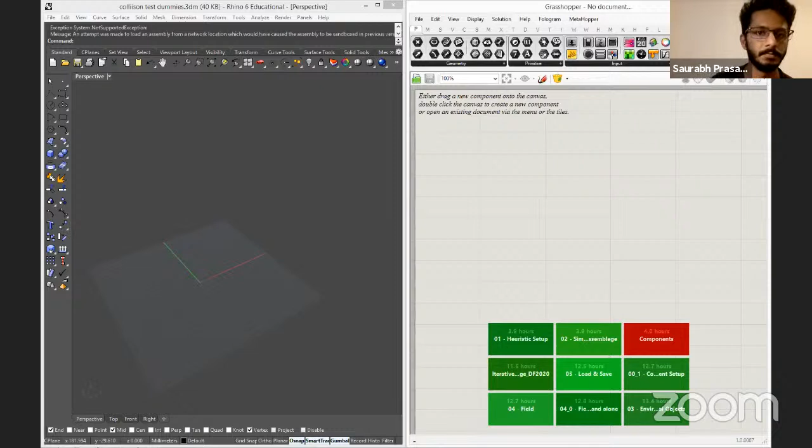Like I told you, this is my first remote kind of workshop. I'm really not used to doing this. I'm so used to the dynamics of a classroom in presence, where you can actually feel the classroom, so sometimes you might have the feeling that I'm droning away. It's just very hard to have the feeling of your response, of your attention, when doing this in this way. But I will try my best to keep your attention high.

So just to start with, if you have your material downloaded, go to the folder inside the material folder. You have a bunch of subfolders, some Grasshopper definitions, and a Rhino file to start with. Let's open up Rhino and Grasshopper if you haven't done so already, and open up the 3DM file, the collision test dummies file. And in Grasshopper, we're going to open the first one, 00_0, the orientation principle.

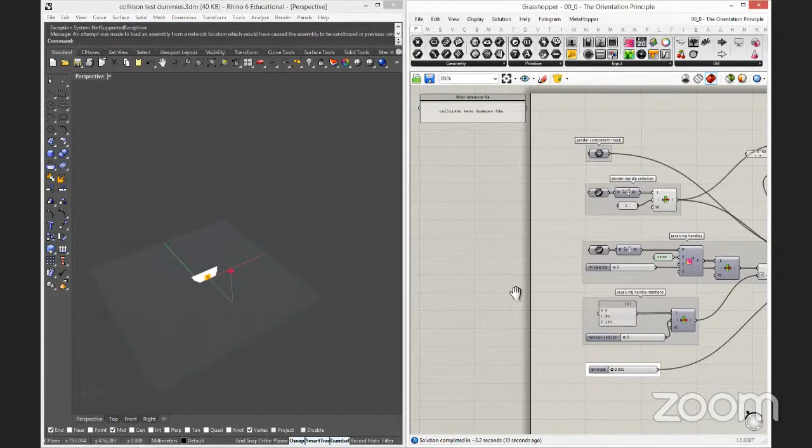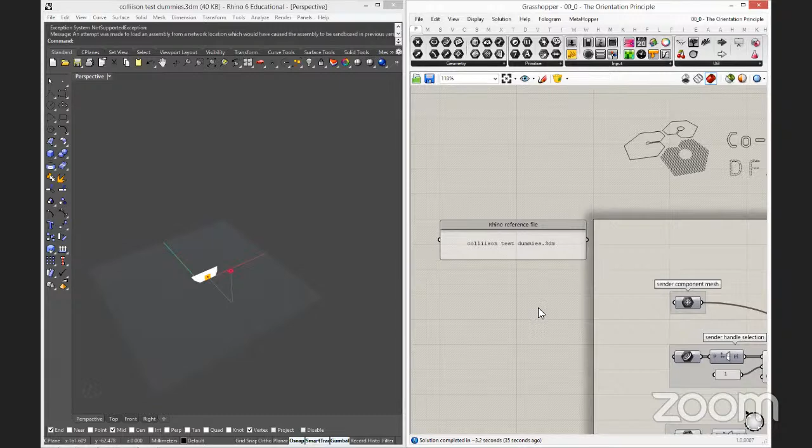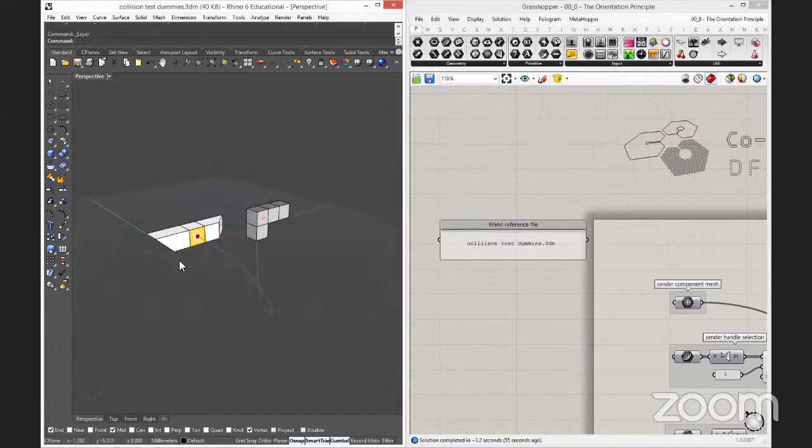Let me have a look around before we start. In each of the definitions, in this position on the top left, there is the Rhino file that you should reference with the definition. So in case something is not working, first check if the correct Rhino file is open. In the Rhino file, there are some layers switched off, so bring up the layer panel and switch on the components layer. Now you should see the basic geometry of the components.

So how does the basic principle with which we are working work? When doing assemblages, what you do is basically put an object and stick it onto some part of another object. That's the very elementary operation. To ensure this, the basic command that you use is an orient command, so you basically orient an object on top of another object.

When you have to define a position in space, what you need in terms of data is just a simple point. But to place an object, a simple point is not enough, because if you define just a point, the object can be in that position, but you don't know its orientation, since the object could be in infinite possible rotations around that point. So in order to define the precise position and orientation of an object in space, what you need is to define a plane, a coordinate system.

In Rhino, the object that corresponds to a coordinate system is a plane, which is not really a geometry, but much more akin to a real user coordinate system. In Grasshopper, these objects are called planes, but remember, they are coordinate systems.

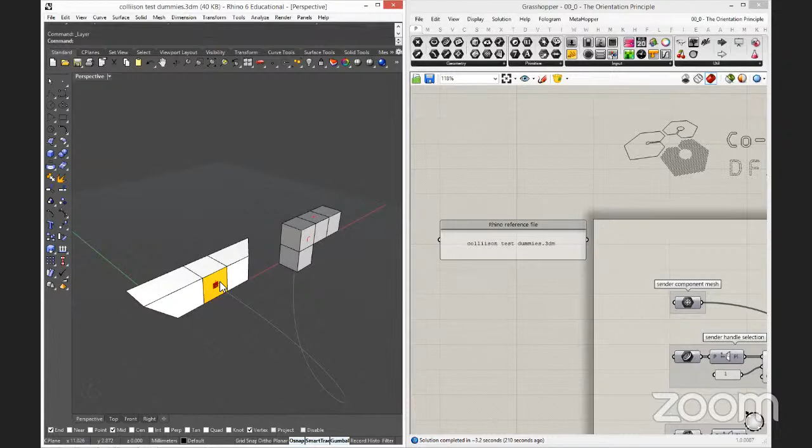It's just the concept that there is one plane that acts as the plug and another plane which has corresponding characteristics that acts as a socket. So when you have to plug things, you do this sort of thing. So how does this work in practice?

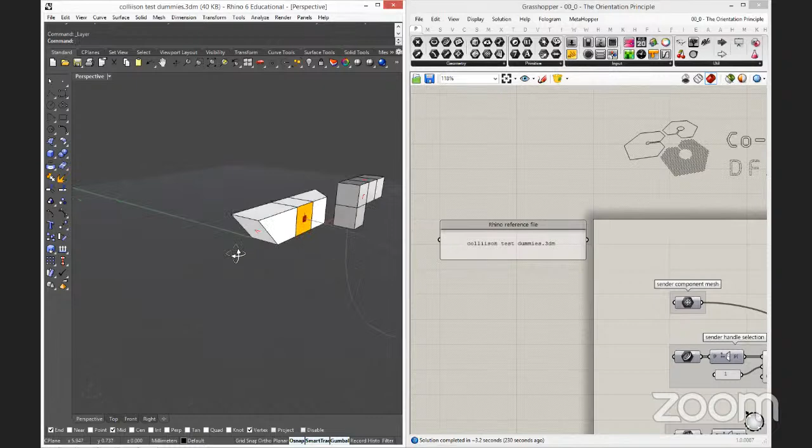So in the case of the file, I have defined two very simple geometries. And around these geometries, you can see there are some polylines shaped like an L, just like this one or this one. These L-shaped polylines are the geometrical objects that you're going to use to put a placeholder for a plane, because actually the polyline acts as a placeholder for 3 points.

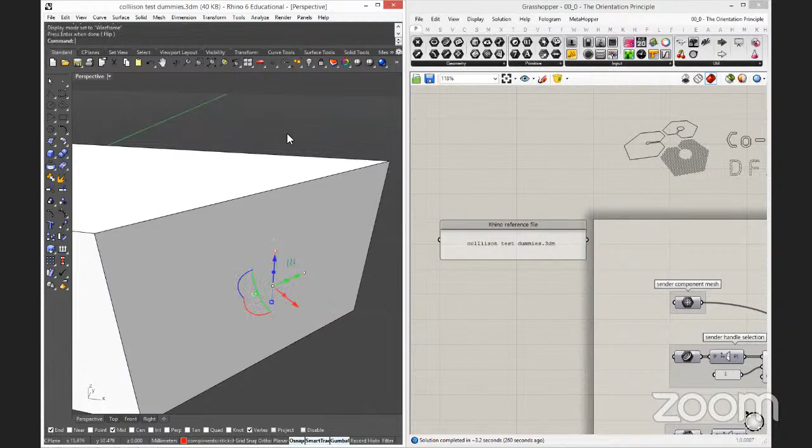So if you look at the directions of this object, now let me go to, well, what happened? Sorry. Okay, let's see in wireframe mode.

So if I look at the direction of, for example, this polyline, you see the polyline has to be drawn with a specific sequence for the points. This is the first point, the center is the second point, and this one is the third point. So the points have to be perpendicular to each other, but you start with the point that is in place for the x-axis, then the origin, then the point that is in place for the y-axis.

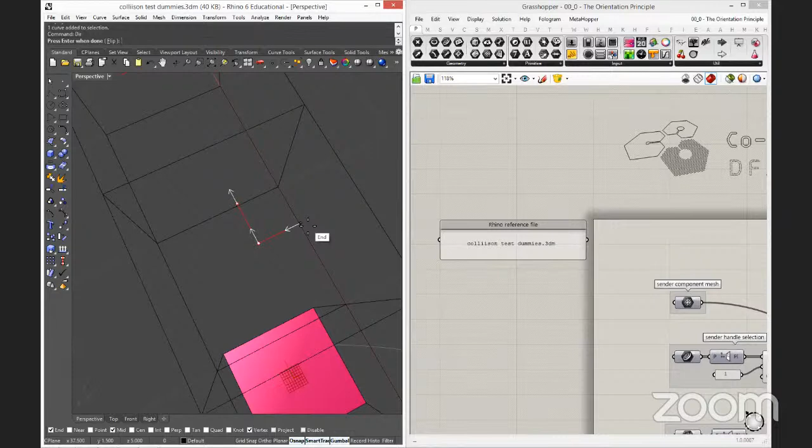So you know in this case that the z-axis is going outward with respect to the object, because of the orientation of the coordinate system. Are you familiar with the right-hand rule to determine the position of a vector when you have two perpendicular vectors? Or are you familiar with vector geometry enough to understand what a cross product is? Please say yes or no.

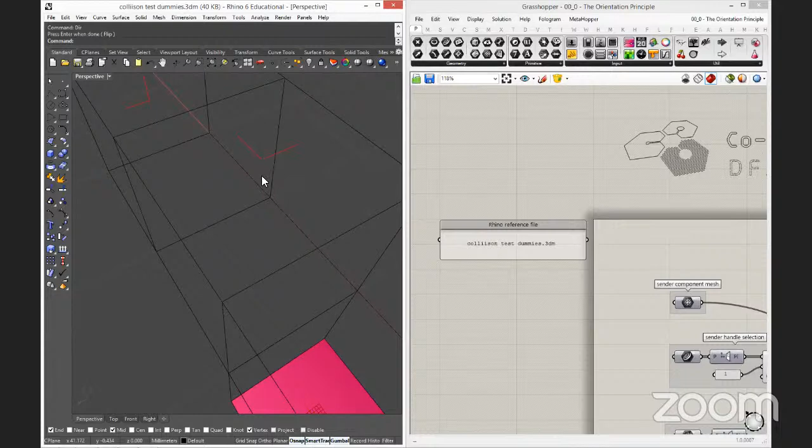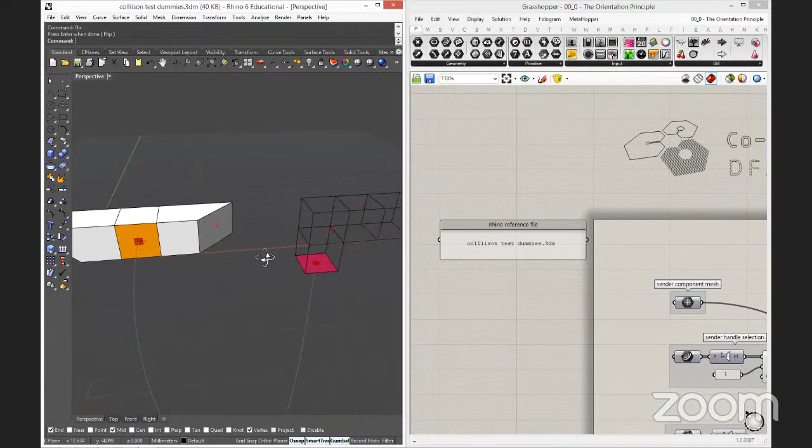Yes. Okay. So you know that if the two vectors are shaped like that, the cross product is going outward from the object. But if I keep this vector like this and I reverse this one, the z vector will go inward, right? And that's exactly the principle. If I want this object in this colored area, which is represented by this L-shaped polyline in the center, to go exactly in correspondence with this other colored area, since the object has been designed to be modular so that this yellow square is exactly shaped as this pink square, I have to place a sender plane here, with the Z outward.

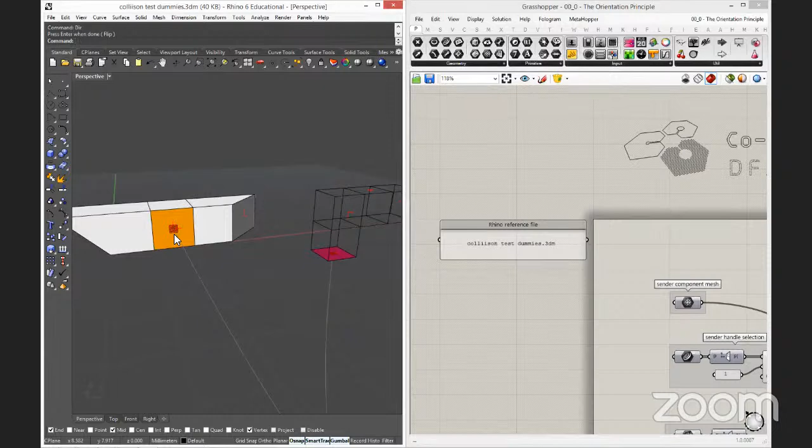And if you ever used Orient, you know that to do an orientation, the object will be transferred from this plane to the corresponding plane. But if I use another outward plane in here, this object will stay inside the other, because the planes will be facing exactly the same direction. So the trick is, for every position, you have a sender and a receiver plane. The sender plane points with the Z outward. The receiver plane is the same, except it's flipped around the Y-axis.

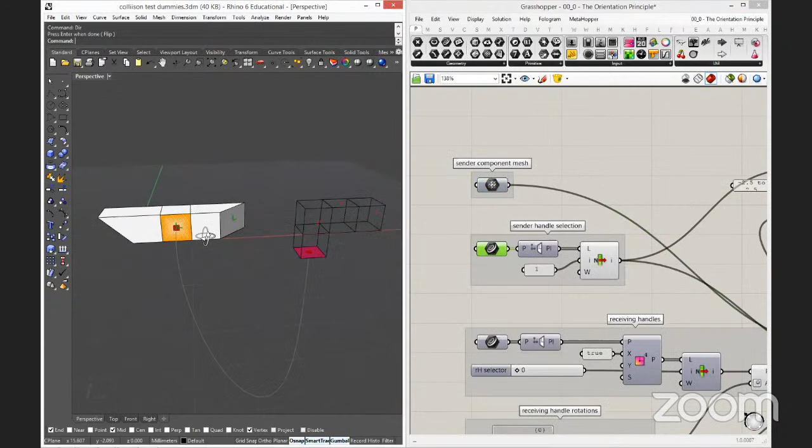So let's see this in practice. This is our sender component, the one that is highlighted. These are all its potential sender handles, and we selected just this one for practicality. And then you can select with this selector which handle you want to go into in the target object, the receiver object. So we'll call the one that moves towards the other the sender object, and the one that receives the object the receiving object.

You can also decide if the receiving handle admits some rotation. We'll look at the rotation a little bit later. So let's animate this. If you just scroll the slider, you will see the object moving exactly into position. Just imagine that from here you always have an arrow which represents the Z-axis that needs to plug into the Z-axis that goes inward in here. This is the kind of plug-socket movement that I was talking about.

So this is the idea by which you orient objects. You start with a plane in a specific position, and then you design a plane if, let's say, this attachment should be compatible. You should design them so that the handles, the orientation, and the position end up being in the same place. Since this figure is a square, it doesn't matter if I plug at 0 degrees, at 90 degrees, or at 180 degrees, because being a square, if I rotate 90 degrees, the component will still be compatible.

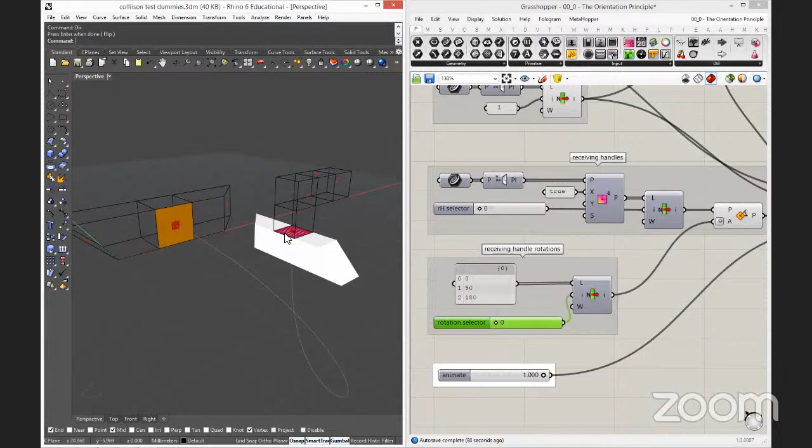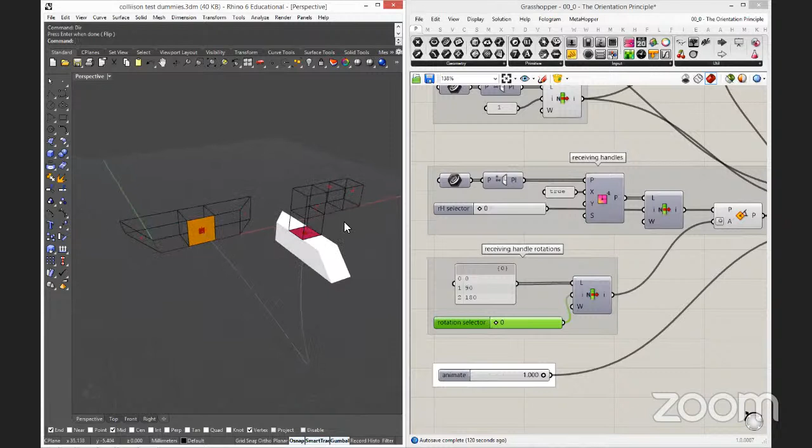When designing the components, you will have to design also the specific positions of these handles. And all of the handles are going to be potentially both senders and receivers. This is going to be up to you to design them in a way that you make them compatible when the shapes are going together. So you'll need also to do some tests for the design of the component so that you know which one is compatible with which.

In this specific case, if you look at the two components, they are starting from a very simple modular principle, which is they start from a box and then there are some more boxes. It's just that this one has some slight variation in the ends. So this plain yellow square here is basically compatible with every possible handle in this other object.

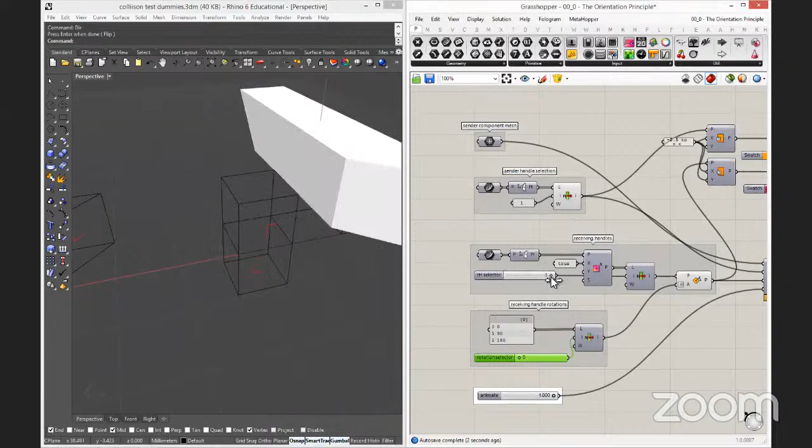So if we change the destination, we see where the object ends up, right? And we see that they are all compatible because they come from exactly the same shape. And since they are square, all of them support this kind of possible rotations, right? But if I look at the faces at the edges of this one, this is not a square anymore. This is different proportions. It's actually 45 degrees skewed in the horizontal and in the vertical direction, respectively.

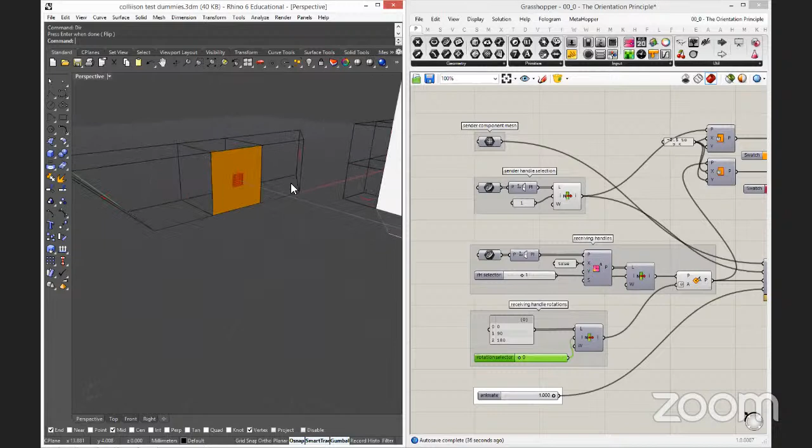So these two handles are not compatible with this yellow one, nor with any of the other objects, but they are compatible with themselves. So you will be able also to define a specific type for the connectors, or handles as we call them. So this square kind of handle can all be assigned to a specific type, and you can call it type 0, for instance. So all of the squares, you can define them as handles of type 0. So the system will know that they are cross-compatible with each other.

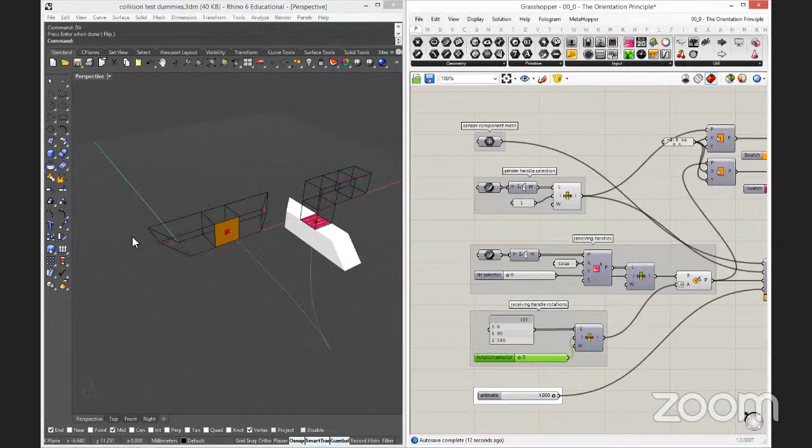And these two, since they are compatible with each other, but not with all the other ones, you can define them as handles of type 1, for instance. And you can go on and define as many types as you want. The system will be able to distinguish the type of handle and allow you to connect only handles of the same type with each other. So an object can also connect with itself, if you want.

Now, this is just a very, very simple visualization of the basic principle. But right now, what we will do is to start building up our first components and objects, because then you have to understand a few things that the objects are going to contain in terms of data that is going to be useful both for the assemblage process and for what comes next. Any question?

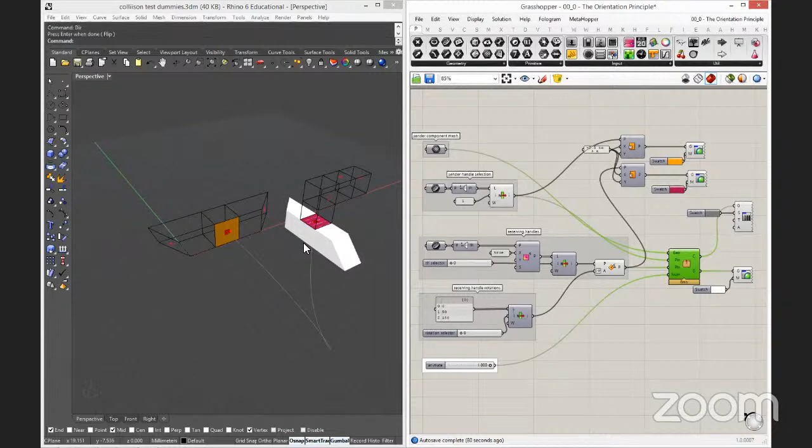No, that's good. Okay. All good. Great, perfect, thanks.

You will see also that we are going to work with, like I said, very simple objects, but we'll also give you some design pointers that come a little bit from what somebody else has done and out of experience. And some of you at least will notice a very strong similarity with a plugin that's called WASP and was developed by Andrea Rossi. There are a lot of things that WASP already does, but there are a few things that WASP doesn't do yet. So kudos to Andrea for developing WASP, which is a really good plugin.

I took a lot of ideas in terms of what WASP does, but then I decided to develop an entirely different project. Also because it's not in Python, it's in C#, because I'm more familiar with the language. So that's the need for the library. It's essentially a container for custom data types so that you can pass them from one component to the other.

I plan one day to transform this into a proper plugin, but until then, things are pretty much in evolution. So this is the reason why it comes to you in this very raw form. There are custom C# components and the library, and it's not really properly packaged yet. Because I still need to iron out some kinks, and actually I wanted to have feedback from those of you that are more accustomed with this kind of workflow, because we're going to do things a little bit differently.

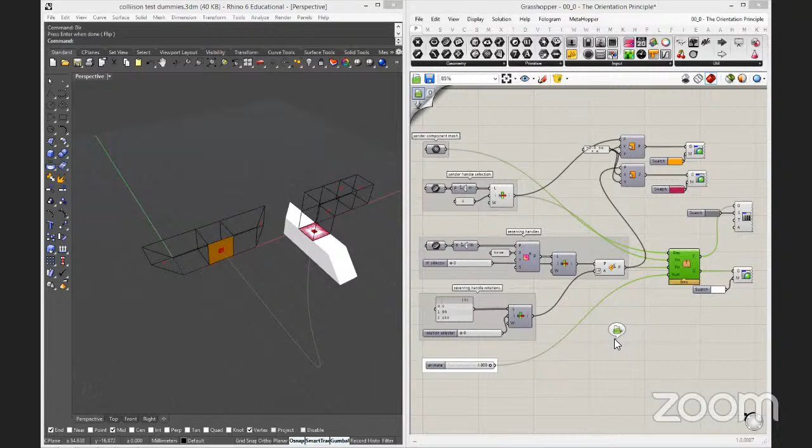So let's move on to the 00_1, the component setup definition. You can keep this. All the definitions up to the 05 work with the same Rhino file. So when you open the definition, you will actually see a prompt asking you to locate assemblies.dll. If you do it as soon as you open the file, Grasshopper should be able to point all the components in the correct direction for it. I don't think you have to do it component by component.

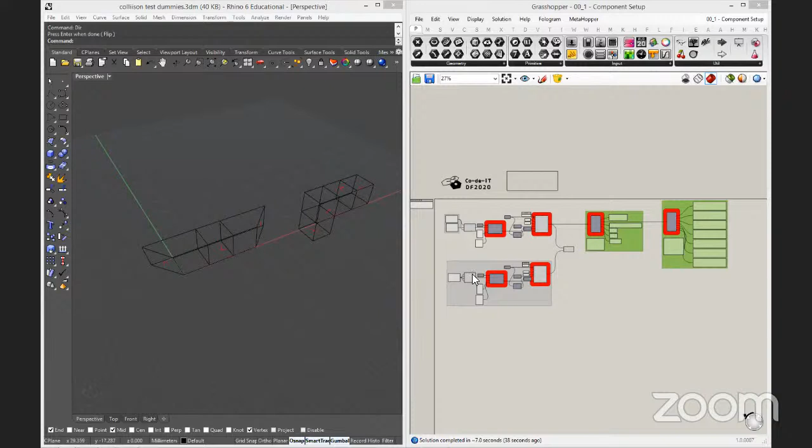So, okay. Let's start from the basics. The first thing that you need to do in terms of bringing your design into Grasshopper so that it's going to work with the system for the assemblies is to tell the system to build the handles. For any handle, you're going to need the L-shaped polyline. Just remember the sequence of points for each of them.

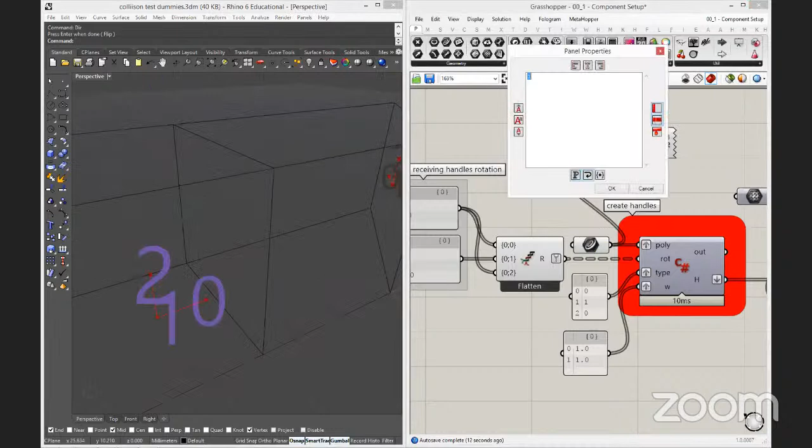So if I explode them and just put a point list just to see the order of the points. Yeah, sorry, I need to place the points, of course. Well, a little bit too much. Yeah, better. So you see the order of the points for each of the handles. 0, 1, 2. Maybe it's too much, even 1. Okay, now we go. 0, 1, 2, 0, 1, 2, 0, 1, 2. So you see how the polylines were actually drawn in the file.

So these polylines are converted into a plane inside this component. And for each polyline, you have to specify also all the possible rotations in case each of them works as a receiving handle. So all the polylines define, first of all, that in this position they work as a sender handle, and the sender handle has like

Probably you've lost me for a second there, I think. It's because of the rig I'm using for the microphone, because the computer microphone is so close to the fan, and the fan is like an airplane jet right now. So since I don't want you to hear me like I'm attached to the outside of an airplane, I had to rig the phone to work as a microphone. So again, if you stop hearing me for any reason, just make some noise, do something, and then I realize.

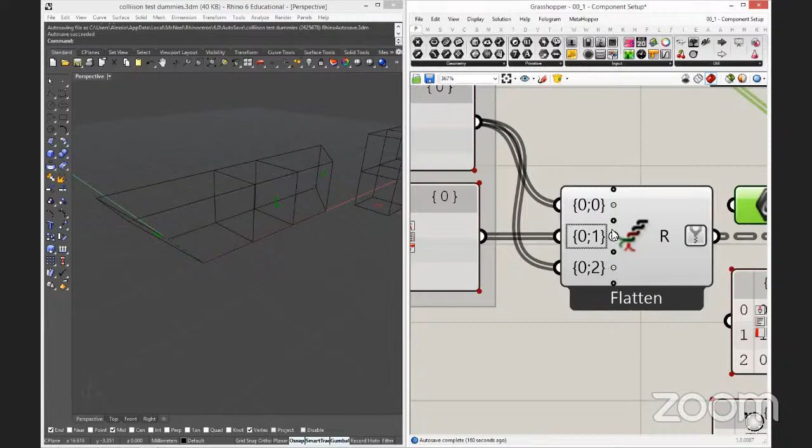Just remember, you should have an equal number of branches here to the number of polylines that you place in here. So even if you have just one rotation, just place a single number, but still use this entwine component to build up the set of rotations. Then you have to define the type. So in this case, you will see that the first and the third polyline are of type 0, and the middle one is of type 1.

Because of what I was saying earlier, you will see that all the handles in this other component are of type 1, because they are all compatible and they basically share the same shape. But the shape thing is more up to you in terms of design. The system, in reality, doesn't know anything about the geometry of the component in terms of recognizing the handle. It's up to you to design them so that when the 2 planes are coming together, the geometry is coherent and it sticks, and you can use it to create certain effects.

But the geometry coherence is actually a very important thing for using the assemblage as a computing instrument later. So if the geometry is not compatible, let's say that you define this as type 1, and in the other component, type 1 corresponds to a circle or a cylindrical thing, then you have like a cylinder going into a square, and it doesn't look good, okay? Long story short.

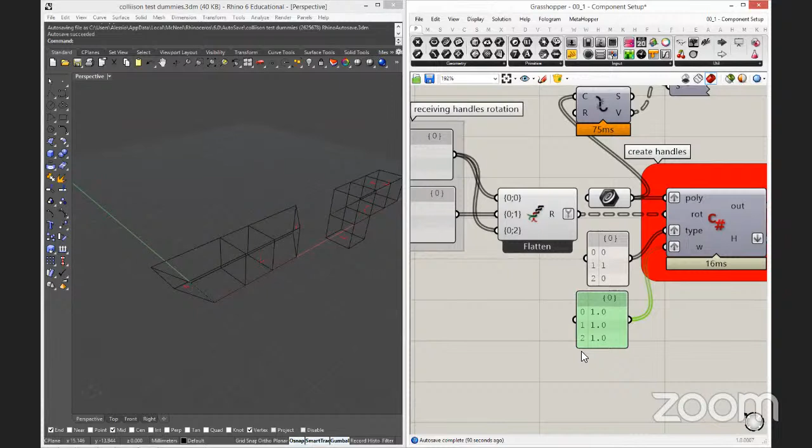So the weights should have, in theory, more or less the same role. They represent a sort of, let's say, abstract kind of section for the flow of data to go through. The bigger the weight, the larger the section. So if you want to distribute the data or see how a certain data flows through the system, then you input an amount of data in a portion of the graph, and then you see how it distributes around.

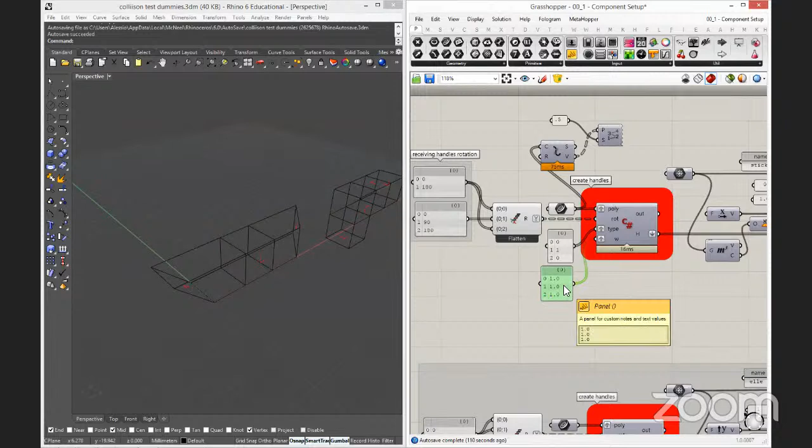But for the moment, they are unused. This is one of the things that I had in mind to develop later. I didn't know if there was time to do it for the workshop, but it definitely is going to get done later. But yeah, at this moment, you can really put whatever value you want. It doesn't matter. So what comes out of here is a custom type called the assemblage handle that is then managed by the other component, the builder of the assembly object.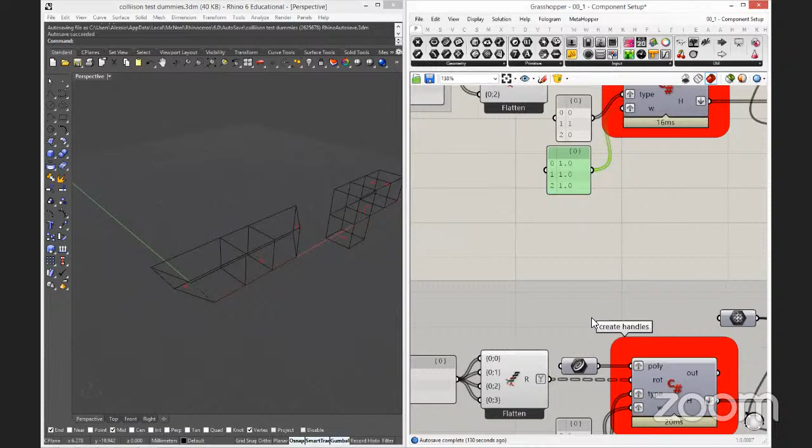The same thing happens for the other objects. So we build the handles. In this case, we have 4 handles, so I'm having 4 branches. In this case, they are all of the same type, so they are all admitting the same kind of rotation.

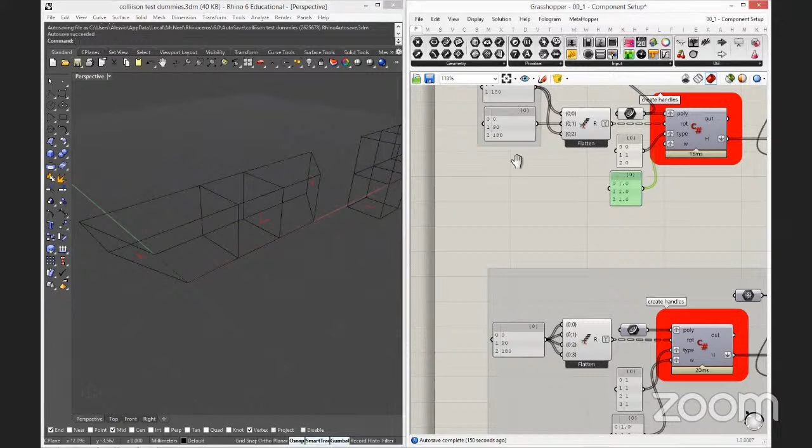In the first one, as you noticed, these handles at the extremities can only work with an angle of 0 or 180. Because since it's not a square anymore, if I rotate it 90 degrees, the edge and the vertices do not coincide anymore, because there is one side that is longer than the other. So the only symmetry for connection is 0 or 180 degrees.

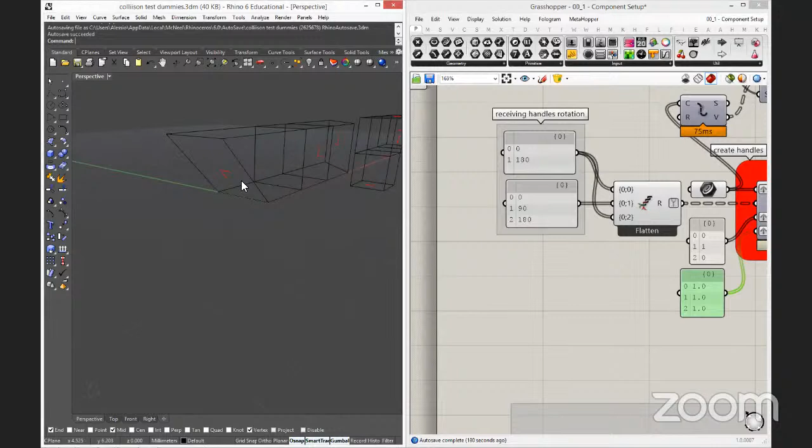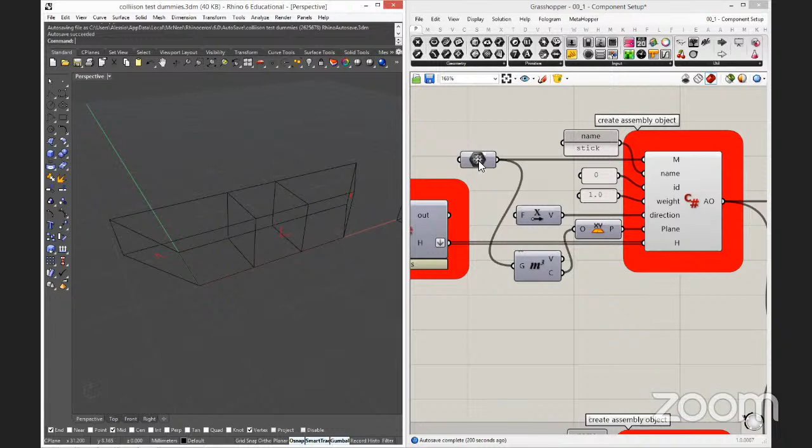So after you build the handle, they go into this other component that contains all the other data to build an assembly object, which is the basic building block we'll be working with. So first of all, you have to input a mesh, which is this one. This mesh is going to be used to test the assemblage for collisions, to make sure that when you place objects, they don't stick into the other object that you already assembled, or they don't stick into themselves.

So this one doesn't have to be the exact high resolution geometry or contain all the details. It's more of a wrap-up of the things that you don't want to get interfered with. So think about, for instance, Christo and Jeanne-Claude wrapping up the Reichstag in Berlin. All the ornaments of the Reichstag are not there, but you have a decent low resolution approximation of a volume. So the amount of approximation is really up to you, but the lower the better. The more low poly you can stay, the better, because it makes the system faster, which means the collision check takes less to perform.

So in this case, I just use the dummy, but you can then, let's say, chisel your geometry inside this space to make it more intricate, more complicated. But again, you don't need to add too much detail to the part. We will see with the design input how something works in a certain way and other things really do not work. Because it's not just the part in itself, it's more the idea of what a part does in a larger assemblage. So, first of all, the low poly mesh, that should be sort of a wrap-up of the boundaries of the object that you want.

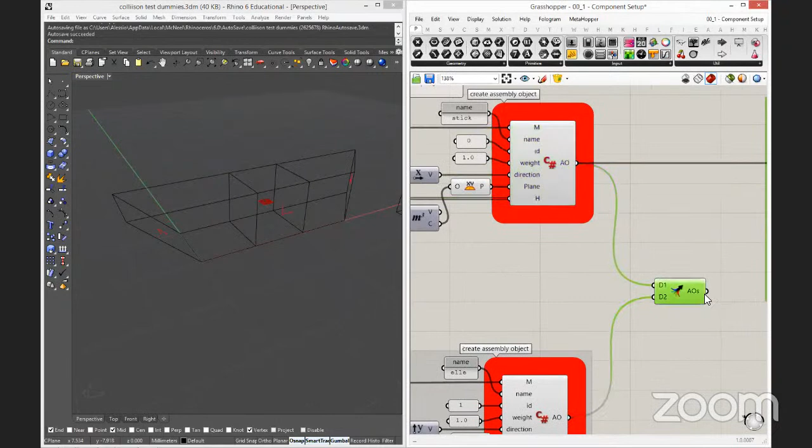So when you place the object, you place them in a merge component. The order in which you place them in the merge component is the order that will determine the real object ID in the system.

Because I realized that if you decide the ID here, but then you decide to plug this second, the system was acting funny. I discovered this yesterday evening or maybe early this morning, so I said, okay, let the system decide. It doesn't matter that much because then you will recognize the type of object.

It's more important that when you see the rules, or if you want to write some custom rules, you recognize the object by name. The interesting thing is that probably you won't have to write any rules at all. You just have to pick from something and then maybe compose the sequence that you want.

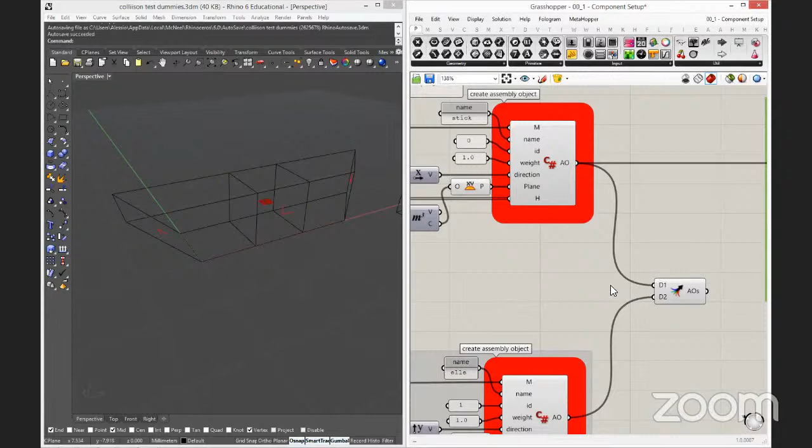But we'll see that in the next definition, maybe this afternoon. I'm going to just end up with these deconstruction components. These are for analysis, and then with a few minutes left, if you have any questions, I'll leave it for that. So these are quite straightforward.

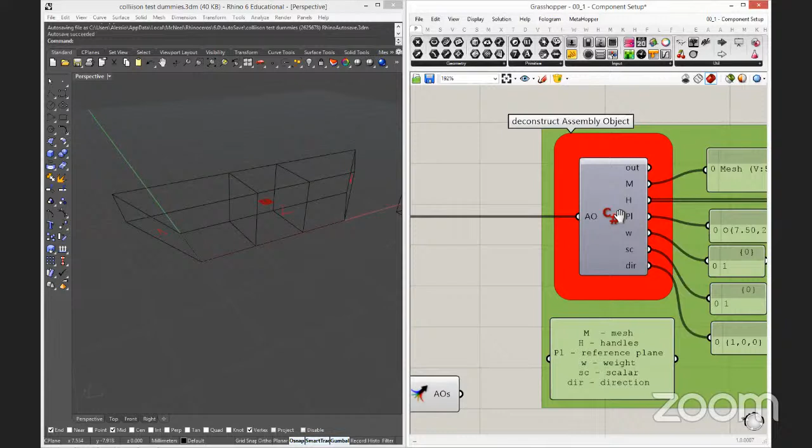So the deconstruct assembly object allows you to peek into an assembly object and extract all of the characteristics: the mesh, the handles, the reference plane, the weight. There is also another value, which is the scalar, which is assigned internally.

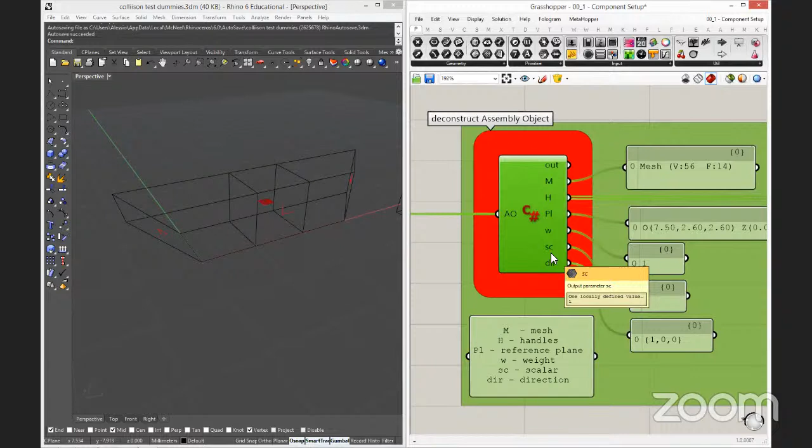That was another thing for this sort of post-assemblage operation that is not implemented yet. And the direction vector - for instance, you can use this deconstruct at the end of an assemblage to retrieve the information for all the assembly objects, because at the end of an assemblage, you're going to have as an output a list of assembly objects.

Inside the assembly object and inside the handles, if we go to the handle, there's also a deconstruct handle. The handle actually contains a lot more information than the one that you build it with. So you have the sender plane, the receiving planes - for each rotation, a new receiving plane is built - the rotation in degrees that this handle admits, and the weight, which is now an unused parameter.

And these are the type - the type that you assign. This one, HO and NH, these are the interesting ones that you want to use for analysis. HO is the handle occupancy. So if the handle has been connected to some other component, it will take the number in the assemblies list, the index of that other component. Otherwise, if the handle is not occupied, the value is going to be -1.

So after an assemblage, if you want to test, okay, how many free handles have I left? Which free handles have I left? I'm going to decompose the component, decompose the handles, and look for any handle with the value -1. So I can pick them up and say, okay, these are all the free handles. Maybe I can add a geometry to them

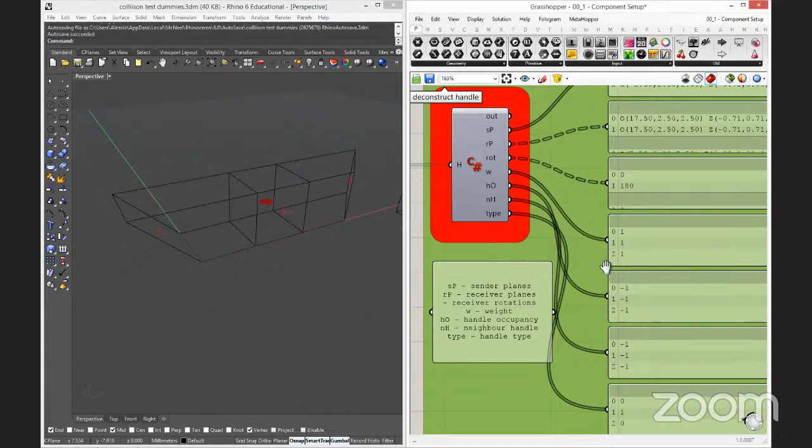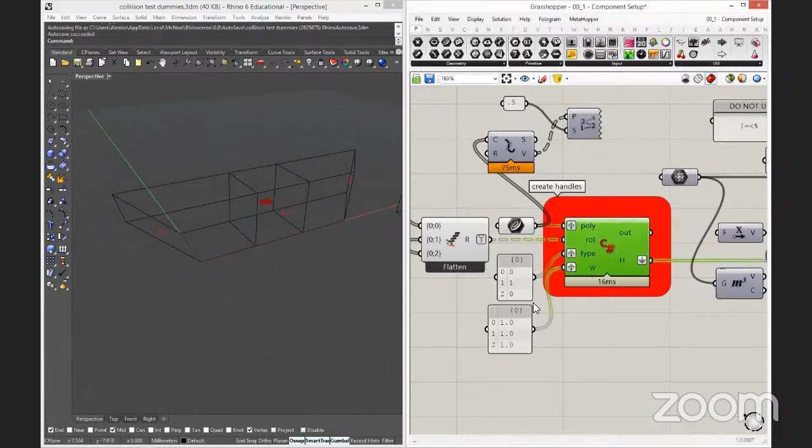We'll take this up again when we start doing our first assemblage, so we analyze the post-assemblage data. But this is everything that's encapsulated in here - all of this data, like handle occupancy and neighbor handle, is managed internally by the system. So you don't have to define it when you define the handle. You just have to define its geometric properties. And let's say at some point the weight will have some significance, not right now.

Same thing with the object, and then there are certain parameters that are managed internally, and they make sense once you have the assemblage per se. Okay, so I'm going to stop here for the morning. If you have any questions, please.

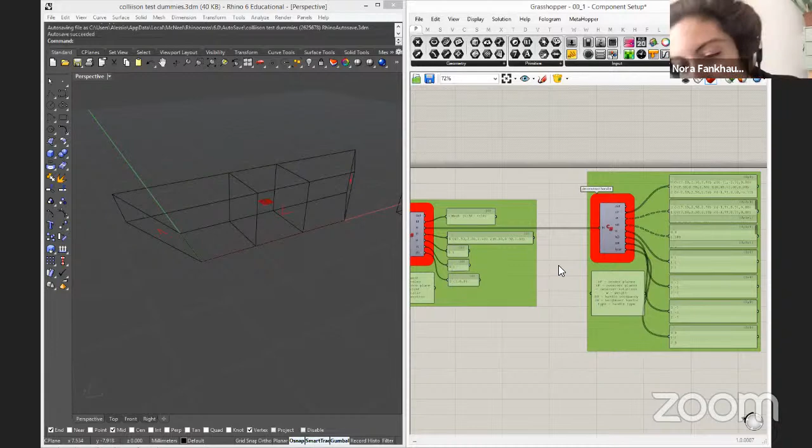Yeah, just with the neighbor handle - which values are there? Is it -1 means left or right, or how does it work? -1 is automatically in place when the handle occupancy is -1. So if the handle is free, you have no neighbor component, so it's -1. Oh, it's just yes or no - so it's yes, the neighbor handle, actually, when the handle is occupied, is the index of the handle of the other component.

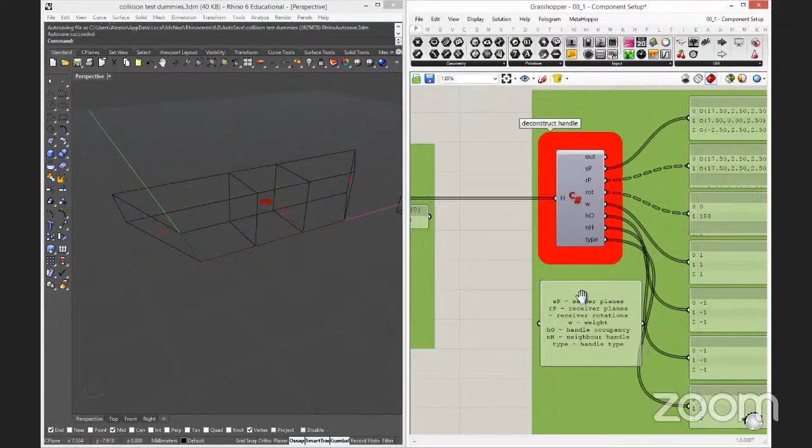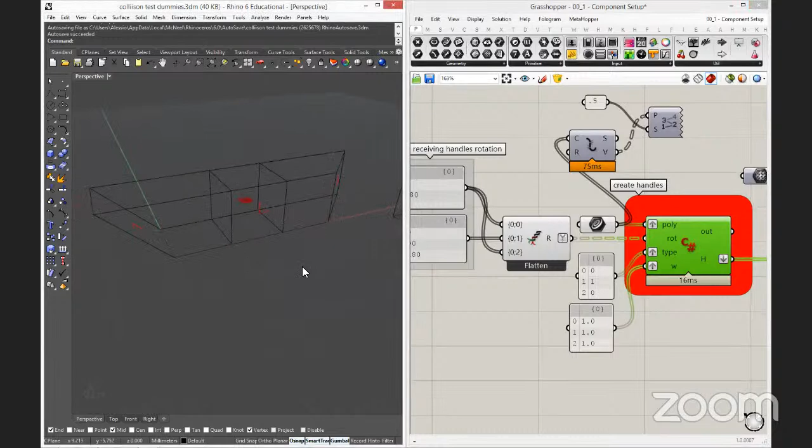So let me explain it this way. Here, each polyline goes into a branch, right? First 0, 1, 2 - so 0 is corresponding to handle index 0, 1 to handle index 1, 2 to handle index 2. So this component has 3 handles indexed 0, 1, 2, that are exactly - if you look at the origin of these curves and let's say, let's transform them into planes.

And look at another of this. Yeah, the numbers are little - yeah, so 0 is this handle here, 1 is this handle here, 2 is this handle here, okay? So the index of the handle depends on the order in which you feed the polylines to the component when you build the handle. The other component here has 4 handles, so the index for his handles are going to be from 0 to 3.

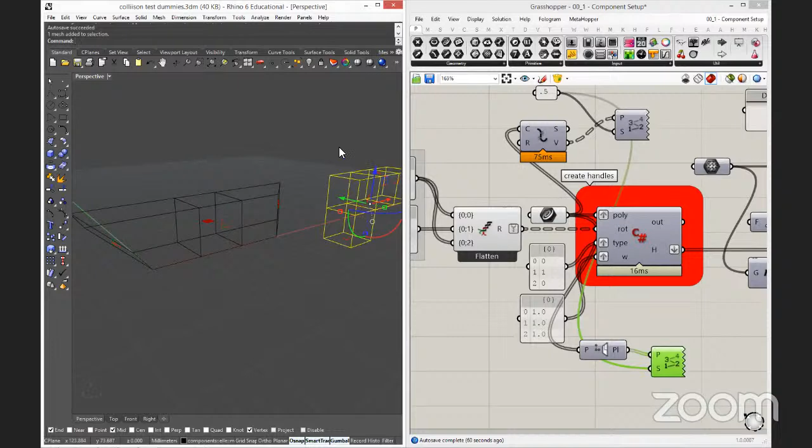So when you look at neighbor handle, you're going to have one of these values. So if this one is the neighbor component to the other, his neighbor handle index will go from 0 to 2. But if that guy is the one attached to the one I'm looking at, so this one is the neighbor, and I'm looking at some connections, I'm going to have an index of one of his handles - so it's going to be an index from 0 to 3. So the index that you find in neighbor handle is the index of the handle in the other component, the one that is connected to the one I'm looking at.

Is that clear? Yeah, thanks. No problem. Any other questions?

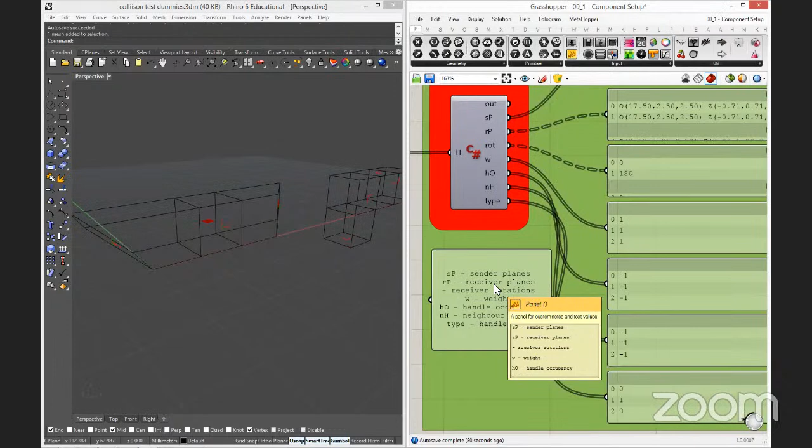I had, sorry, I had another... I saw in the chat some of you guys were discussing an error, and I think I have the same. I don't know if it's a range thing with the modules, version. But the outputs are okay.

It's just an error message. The component is orange, by the way. The culture token, culture neutral public token, that's a harmless error message. It has to do with different versions of Rhino against which the library is compiled. I don't have a precise idea on how to make it go away, but it's harmless. It doesn't compromise the system, it's just a warning.

It's just annoying, but it doesn't do any harm. Maybe it comes up when you have a more recent version than the one I compiled it against. But on the other hand, to have maximum compatibility, you have to try to compile it for the lowest possible version so that it's retro compatible.

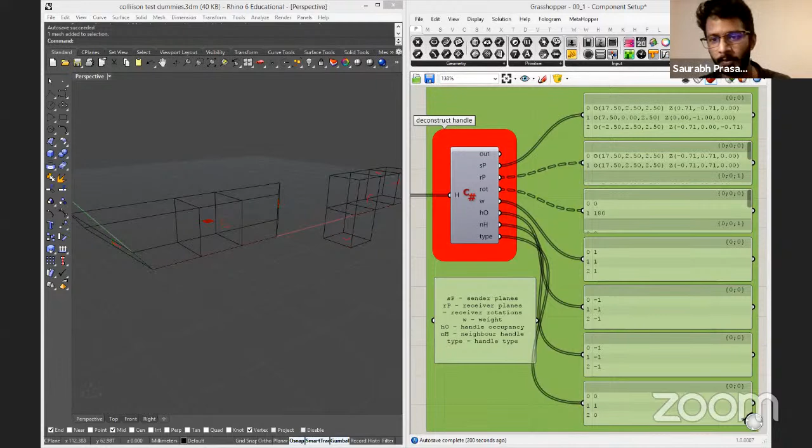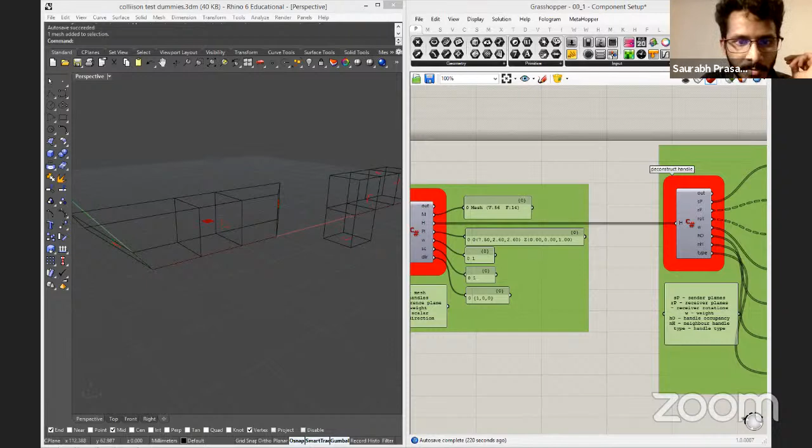But you have output null from where? Where is your null output from? It says error CS1705, assembly version 1.00, public key token null, uses Rhino common version 6.25.2011. Yeah, but okay, that's the message. But do you have errors in the actual output?

I mean, is there some part of the definition that doesn't work? Yeah, I'm just getting null outputs at the end. That's what I was saying. In the out of here? Yeah.

Oh, I think the problem is that you have a version 6.17. Rhino Common version 6.17, right? Is that the same to you? You have a Rhino Common that is lower than 6.26 or 6.25, the 13 one. I'll just check quickly.

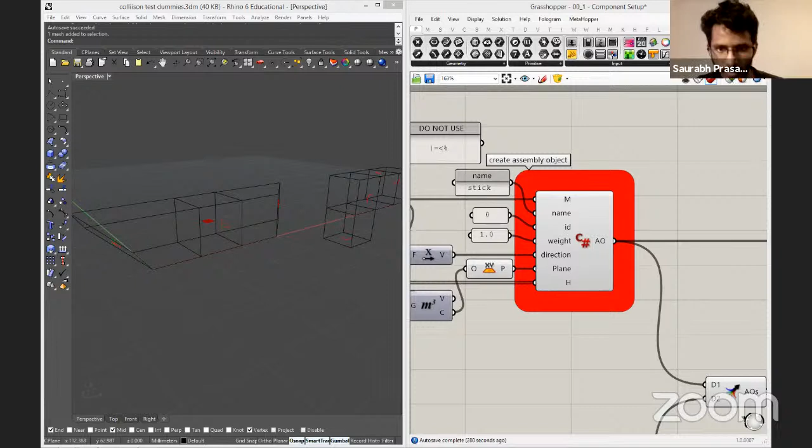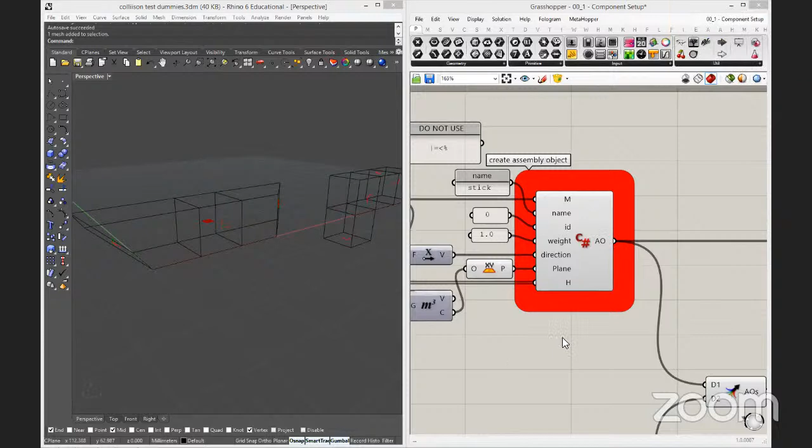Yeah, because if you have 6.13, that's the problem. But when you tested the DLL, you didn't have any problem? No, that time it worked fine. That's very weird, because this kind of error is due to the DLL. But just the deconstruct that gives you an error, or also the construct object? As well, I have all null outputs. Ah okay, yeah, because it makes sense that none of the components work. That is strange, because that should be a problem with the DLL.

If you have a lower Rhino Common version, I have to recompile the DLL for your version. So I need you to send me some files, and I need to check which files you need to send me. I will send an email to everyone asking who has the Rhino SR lower than 25 to send me, or the lowest one.

Actually, I think the lowest you have is 6.17. So anybody who has 6.17, feel free to send me your Rhino Common and some other files. I'll tell you specifically which files and how to send them to me. We'll try to compile it before the afternoon or right after, so that you can work with it.

Or otherwise, like Alexander suggested, there's also the SR27 evaluation version. That would solve the thing without having me recompile stuff. If you can install the evaluation, that will be definitely a lot better, because it will save me time.

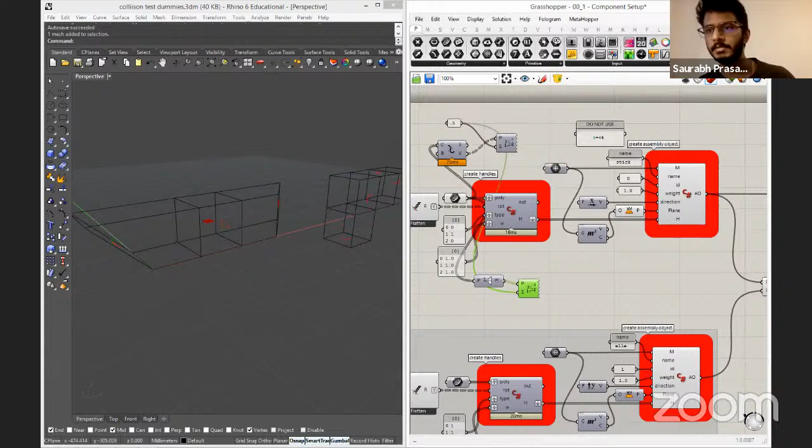I'll try to do it right away. It's downloading, and if it doesn't work, I'll write back to you. Let me know if you manage to download it. Otherwise, in case you don't make it, I will try to compile, but I don't think I can do it before the afternoon session.